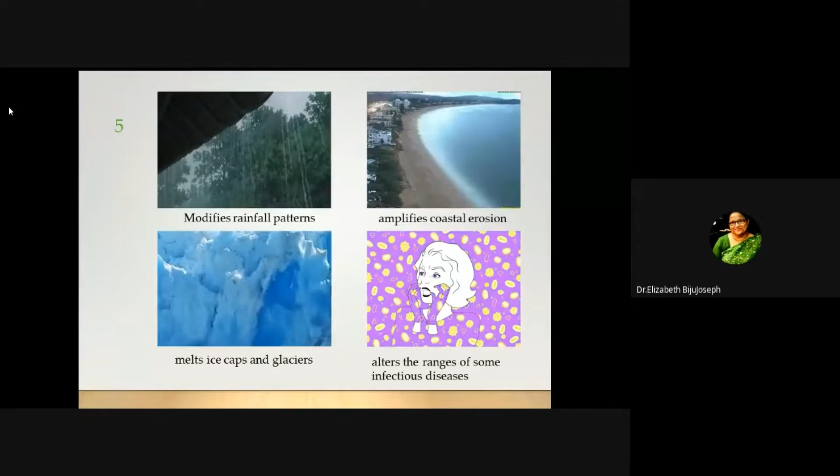Warming modifies rainfall patterns, amplifies coastal erosion, melts ice caps and glaciers, and alters the ranges of some infectious diseases. Some of these changes are already occurring.

Which are the primary greenhouse gases responsible for global warming? Water vapor, carbon dioxide, methane, nitrous oxide, and ozone. The larger the global warming potential, the more that a given gas warms the earth.

Anthropogenic emissions of water vapor are small in comparison to the large evaporative emission of water vapor from the ocean. Methane, nitrous oxide, and ozone have a much larger global warming potential than carbon dioxide.

Then why is carbon dioxide so important? It depends on how long it stays, the period that the gas is present in the atmosphere. Carbon dioxide stays for thousands of years, unlike the other gases. Therefore, its concentration at a given time increases in the atmosphere as man-made emissions happen. So we know that when we talk about the greenhouse gases and global warming, carbon dioxide mitigation is so crucial.

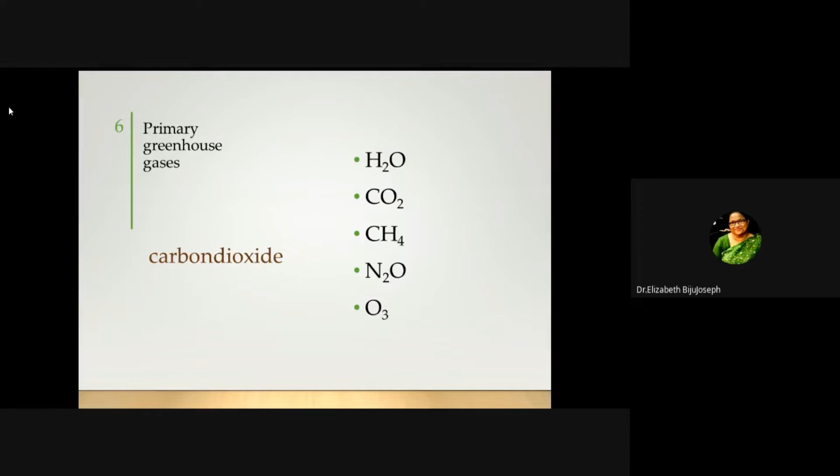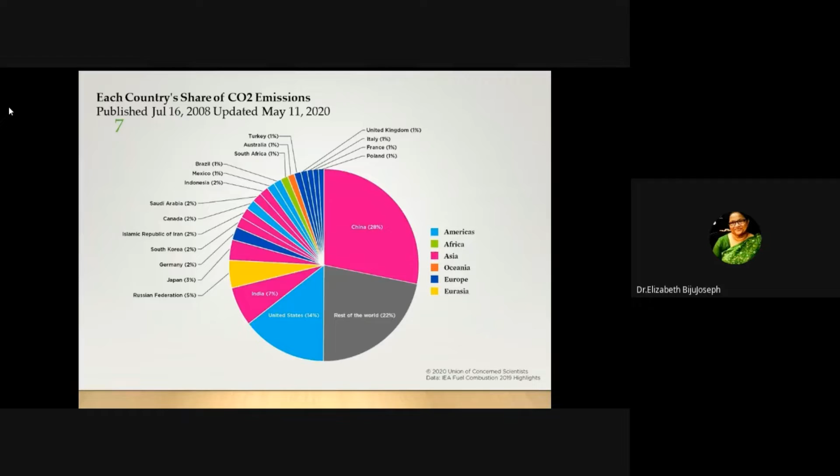Today, we are going to focus on carbon capture from industrial emissions as a way of mitigating the concentration of carbon dioxide in the atmosphere. What are the sources of industrial emission of carbon dioxide? Carbon dioxide is emitted from large stationary sources. The largest single source of carbon dioxide are the conventional coal-fired power plants. Cement manufacture emits around half a ton of carbon dioxide for every ton of clinker.

What about refineries? For a 300,000 barrels per day refinery, the carbon dioxide emissions are in the range of 0.8 to 4.2 million tons per year. The iron and steel industry is one among the largest energy consuming manufacturing industries. Energy, again, that has to be highlighted. For every ton of steel, around 1.8 tons of carbon dioxide is emitted. Therefore, much effort has been put into the development of technologies for the capture of carbon dioxide from process streams.

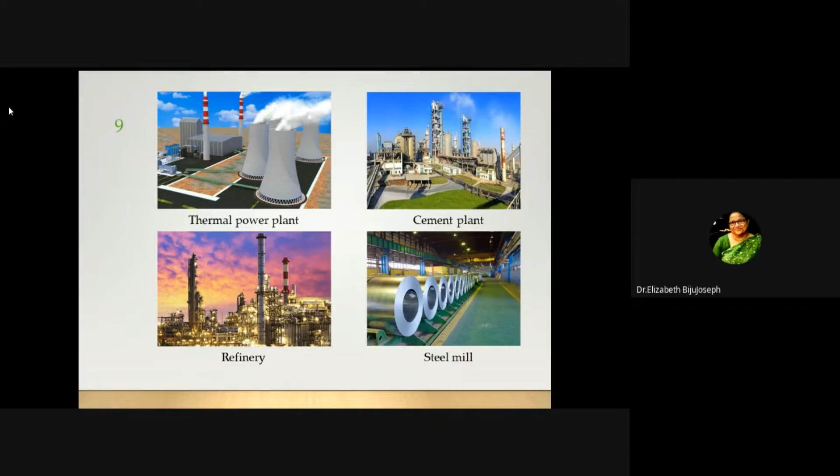This is a closed loop absorption-desorption system, where absorption occurs in a packed tower at a low temperature of around 40 degrees Celsius, and desorption of carbon dioxide from the loaded absorbent is accomplished at a higher temperature, around 100 degrees Celsius. This is a common process configuration. In the power plant, we need to prepare steam and to vaporize or evaporate water. The process requires energy, and the energy is supplied from the combustion of coal.

The flue gas, the product of combustion, carries a large amount of energy. After the energy transfer in the power plant, in the economizer, then the evaporator, the superheater, and finally the air heater, the flue gas which leaves the power plant carries around 14% carbon dioxide. There are other gases along with it. The carbon dioxide capture plant focuses on absorbing this carbon dioxide and making the gas within permissible limits of the environmental regulations so that it can be exhausted into the atmosphere.

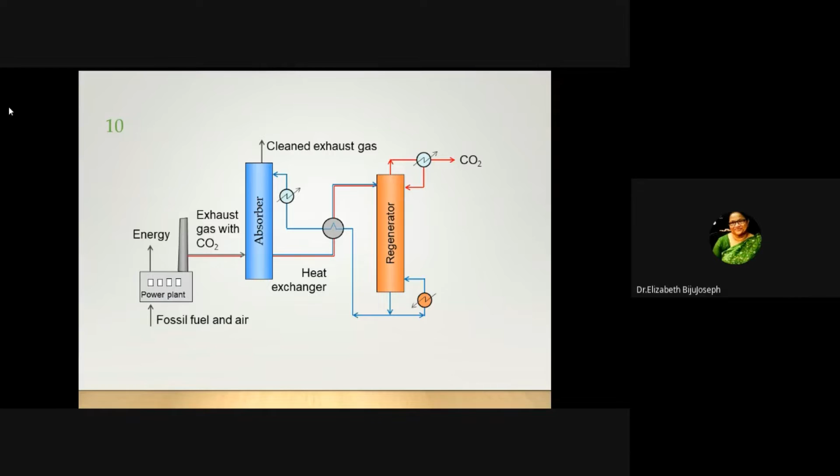And what are the solvents? Which are the solvents that I will be using? The solvents may be classified as physical solvents and chemical solvents. What is physical solvent? Physical solvent is that solvent which absorbs the carbon dioxide without having any chemical reaction, which means the operation is purely physical absorption. The driving force is the concentration difference of carbon dioxide or the pressure difference, which necessitates the need of having a high inlet gas pressure.

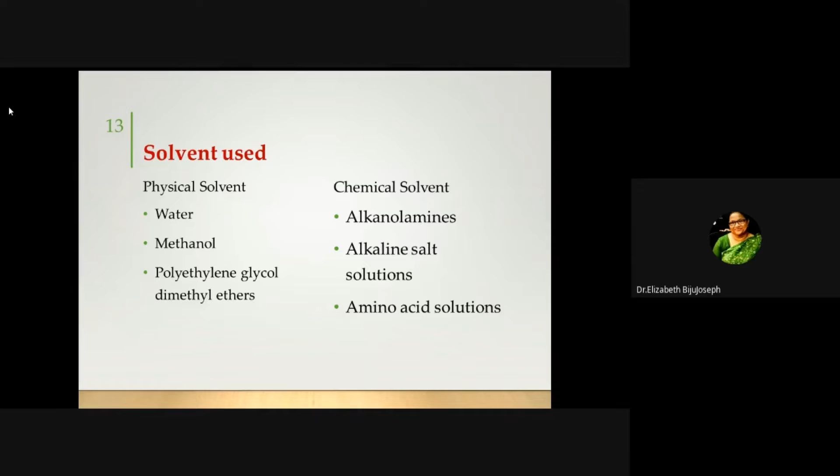So one can use any of this. One could use amino acid. Why would somebody use an amino acid? Because it is again green. The pollution due to the absorbent reduces. Having said all of these things, how do we design the equipment? How do we design the absorber, the regenerator? What are the different parameters that I need to evaluate?

We need to find out the optimum concentration of the amine in the solvent. The primary solvent is water, and you add the amine into it. The concentration of amine is very less. It can be around 2 molar or maybe 3 molar. And you could use very small amount of say 0.1 molar or 0.5 molar of these blended additives which will enhance the reaction. So we need to arrive at the optimum concentration of the amine in the solvent to obtain our degree of separation or absorption of carbon dioxide.

The next thing that one needs to calculate is how much is the regeneration energy to be supplied. As I said, that contributes to the major expense of this operation. What will be the concentration of carbon dioxide in the stream which leaves the absorber? We wouldn't want to work towards 0% carbon dioxide. It wouldn't be economical and not essential.

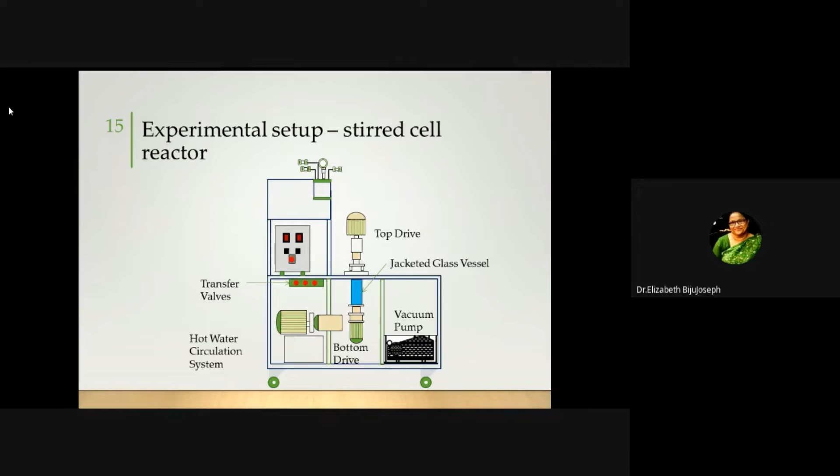These are ionic reactions, and therefore the measurement of conductivity using a conductivity meter ascertains the reaching of equilibrium. If the conductivity reading remains constant for a period of 6 hours, the equilibrium is assumed to have attained. Further to which, the system is switched off, by which I mean the stirrer, the heating, and the fan are switched off, and the samples from the liquid phase and the gas phase are analyzed to know the composition of carbon dioxide at that temperature condition, the composition of carbon dioxide in the liquid phase and the vapor phase.

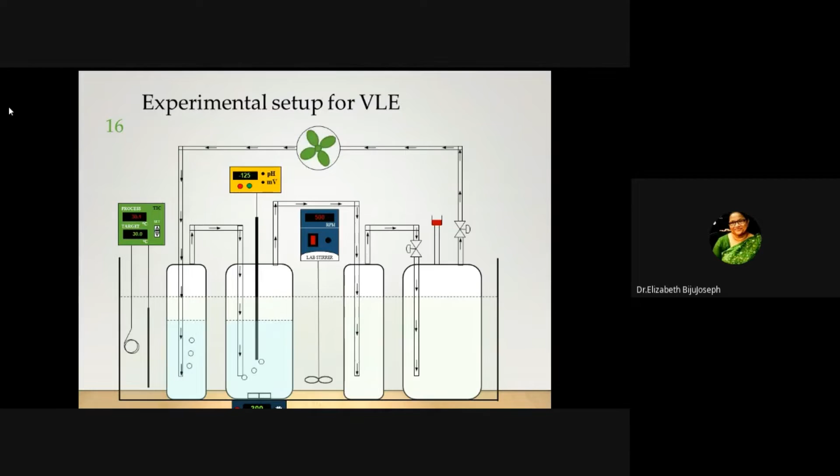This experiment may be repeated at different temperatures and different loading conditions to generate the vapor liquid equilibrium data. Once we have the vapor liquid equilibrium data and the kinetic data with us, we are now enabled to design the column for our conditions. Having said all of these things, this technology of reactive absorption of carbon dioxide for carbon dioxide capture is already implemented in India and abroad.

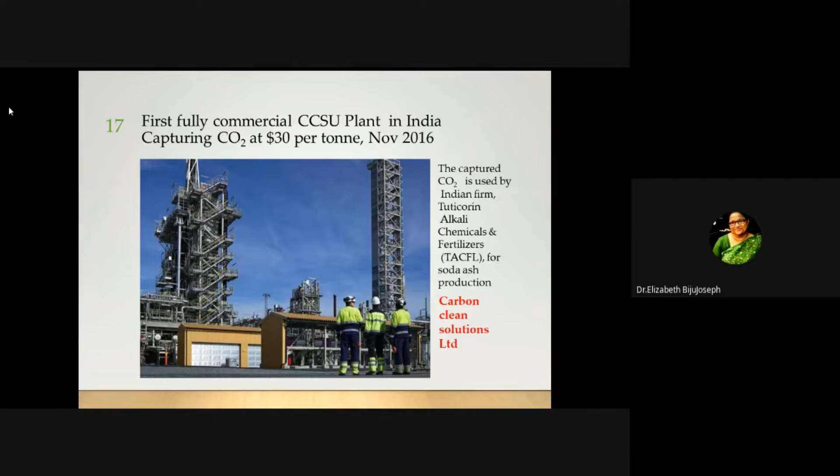The first carbon capture, storage, utilization plant in India was commissioned in November 2016, capturing carbon dioxide at around $30 per ton, when at the same time the other parts of the world captured carbon dioxide at almost double the cost. The beauty of this plant is that the captured carbon dioxide is entirely used by the Tuticorin Alkali Chemicals and Fertilizers adjacent to it for their soda ash production. The technology is provided by Carbon Clean Solutions Limited. This is a zero emission plant. Let us look at another one.

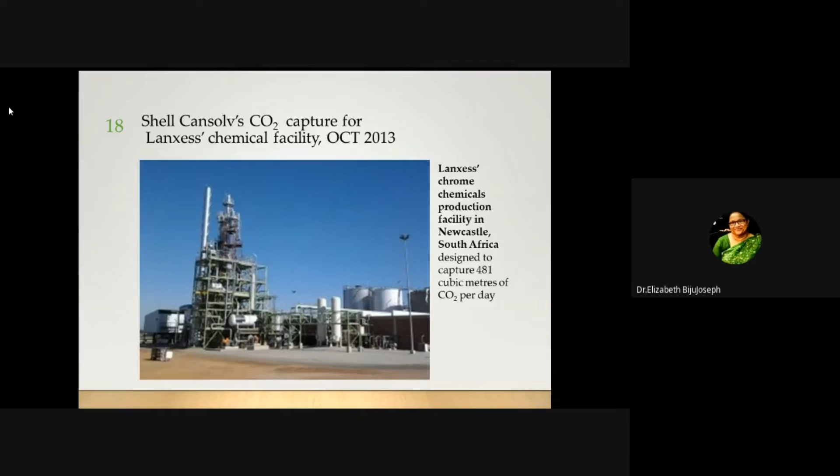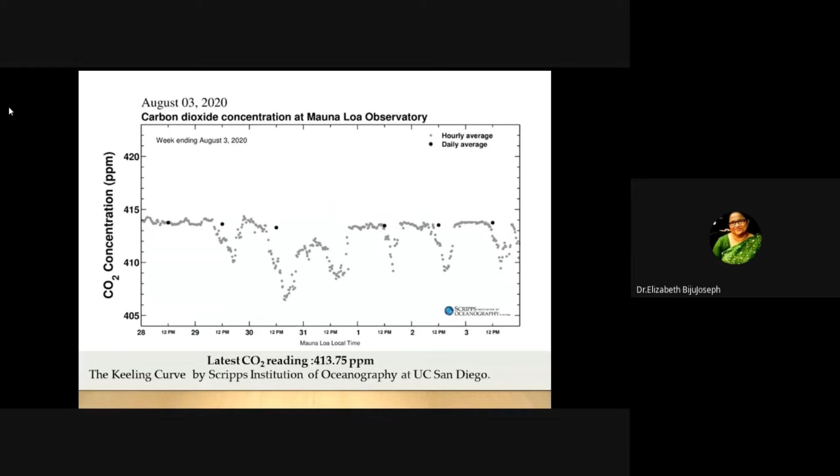In the light of this, we as chemical engineers, each one of us, whether we are already a chemical engineer, whether we are pursuing chemical engineering, or we are students of sustainability, we have to join hands together with all other disciplines to address carbon dioxide mitigation, to pass on to the next generation a world that is livable.

Finally, in closing, this is a quick overview of my presentation and publication, which go into greater detail on this topic.

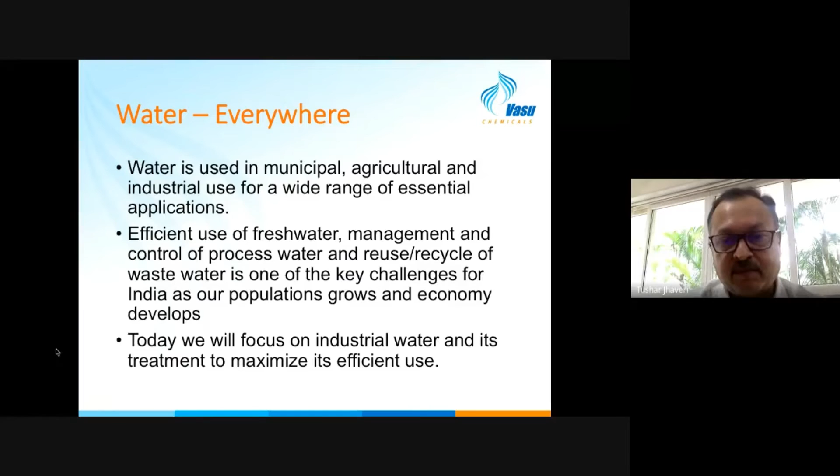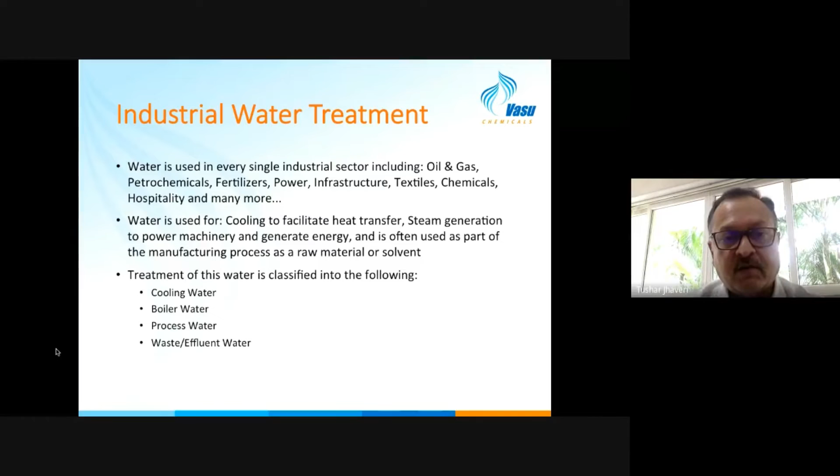Water is used in every single industrial sector, including oil and gas, petrochemicals, fertilizer, power, infrastructure, textile, chemicals, hospitality, and more. It has several uses in the industry, for example, for cooling, for steam generation, often used as part of the manufacturing process as well as a raw material or as a solvent in the actual process of the industrial unit. Hence, the treatment of water can be classified into the following for industries: cooling water, boiler water, process water, and waste or effluent water treatment.

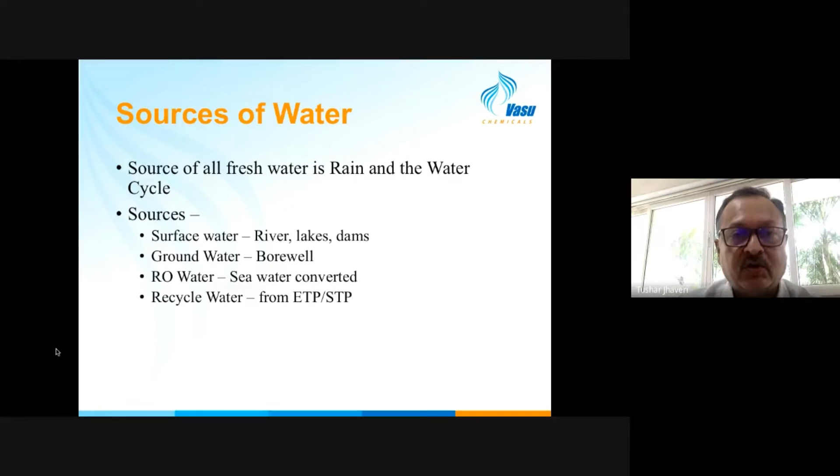The water cycle is most critical. We are well aware of this. I guess we have learned this right from our school days, where the evaporation from the oceans and the land goes into the clouds, and the condensation of the clouds and the precipitation leads to rain, and the water again runs off with the rivers into the water table and into the sea. So this is a cycle that sustains mankind and is the source of our lives and very important for us to survive.

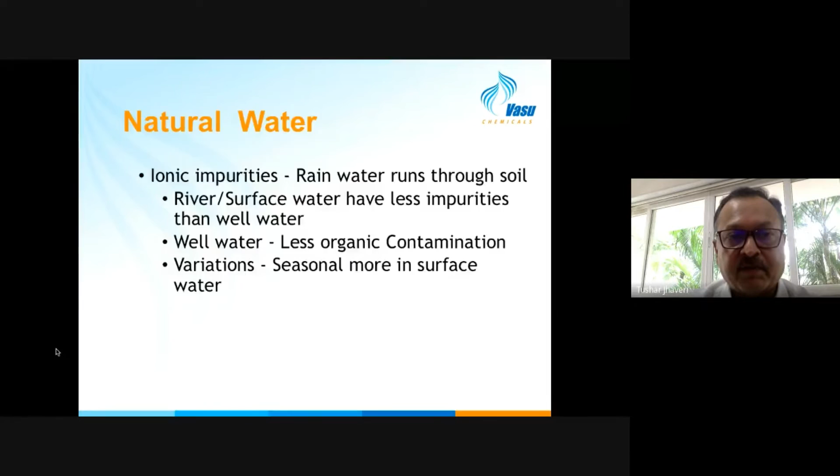Natural water, when it runs through the soil, will have a lot of ionic impurities. The river and surface water will have less, well water will have maybe less organic contamination, and all these impurities vary with season, more so for surface water. If we look at the hydrological cycle, more than 97.6% of the water is in the oceans. The rest is divided into the ice caps and the glaciers and the groundwater and the lakes and rivers and even the atmospheric moisture. But primarily our water is all stored in the oceans.

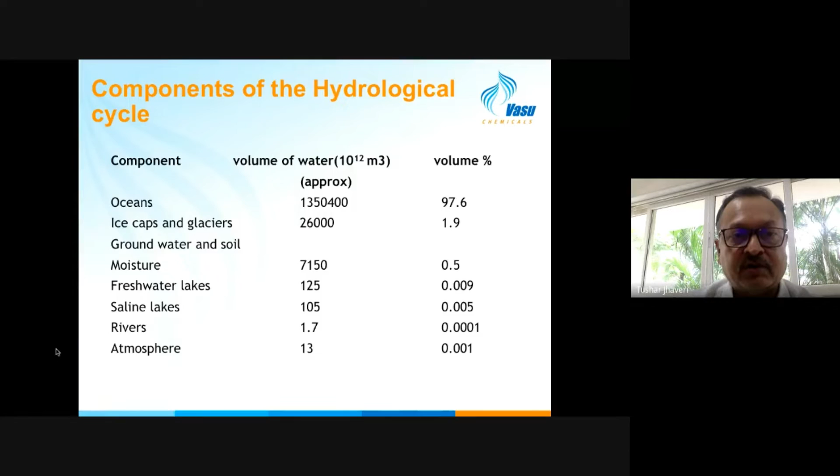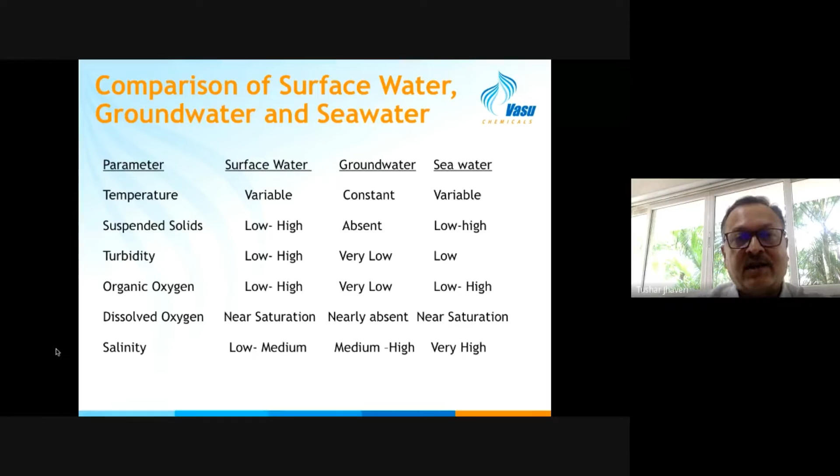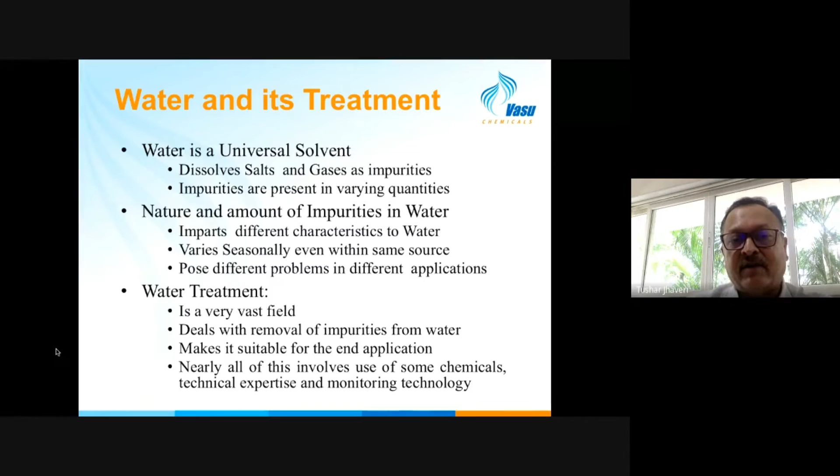Hence, water treatment. This is a very vast field and deals with removal of impurities from water to make it suitable for the end application. Nearly all of these treatments involve use of some chemicals, technical expertise, and monitoring technology. This is very key, and that is where chemical engineering plays a very key role in water treatment.

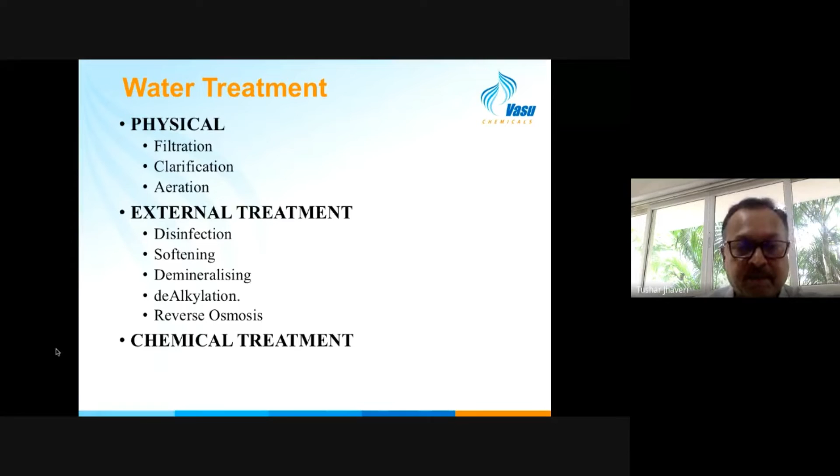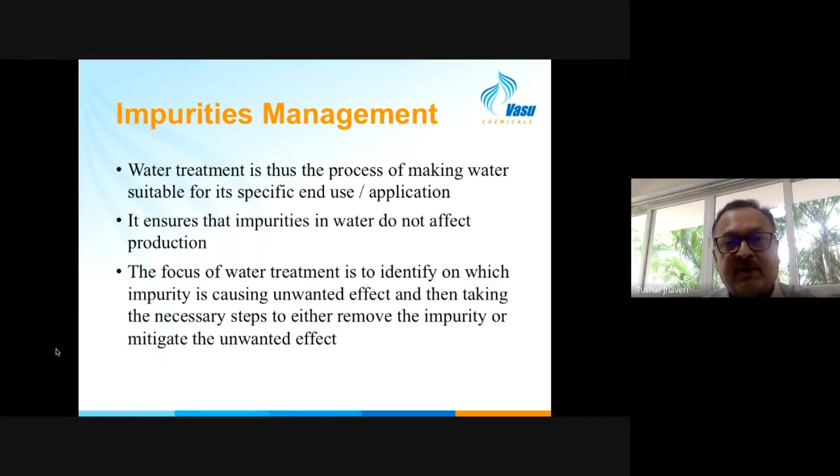So the focus of water treatment always is to identify which of the impurities would cause these kinds of unwanted effects, and then take necessary steps to either remove the impurity, which would be physical, or mitigate the unwanted effect, which is typically the chemical treatment. So this is how impurities management can be broadly understood.

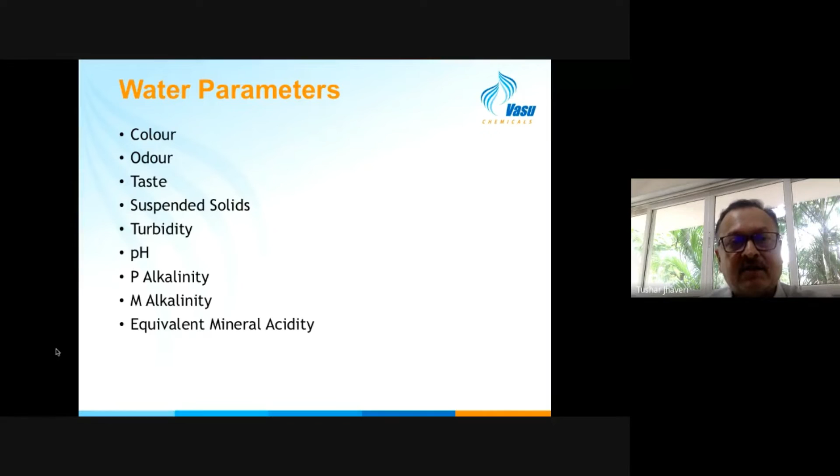So what are the primary water parameters that we would look at when we consider water treatment? Very basic again: color, odor, taste, suspended solids, turbidity, pH, alkalinity, equivalent mineral acidity, chlorides, sulfates, hardness, calcium, magnesium, sodium, iron, silica, TDS, conductivity, oxygen absorbed, COD, BOD, total organic carbon. I will touch on a few of these critical parameters that play a significant role in industrial water treatment.

Color. This is very important because it indicates the presence of undesirable dissolved, colloidal, and suspended impurities in the water. For example, if there is iron present in the water, you will see a slightly brownish or reddish tinge. Manganese would make it black, and if you have organics, then there would be a slight yellowish tinge.

Color is again very important because it gives an aesthetic value to the water and also potability. If you had water with slight coloration, you would never drink it, right? So color of the water is very important for it to be clear and transparent for use.

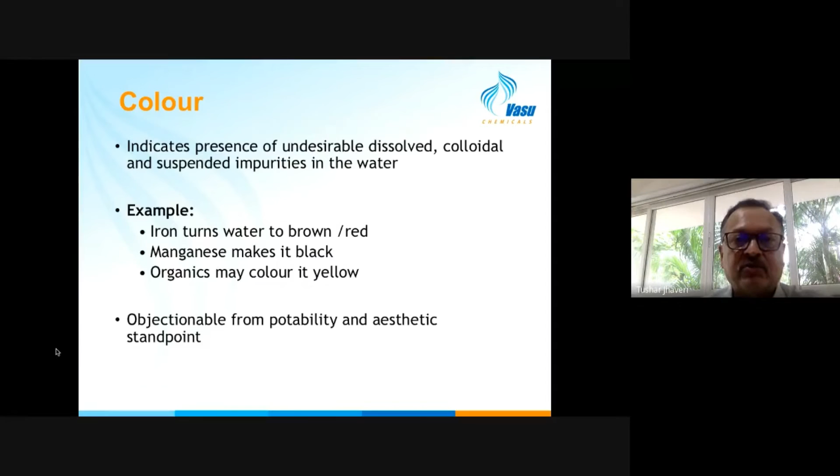Odor and taste is also very important because it indicates undesirable impurities, maybe such as hydrogen sulfide or sewage contamination. This is an important water parameter, especially in the food and beverage industry, because you don't want the water being used to impart any odor or color to the final food being produced in the unit.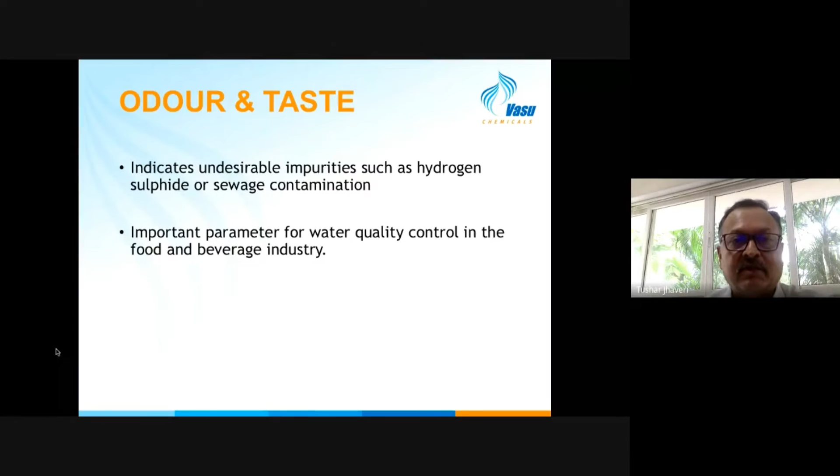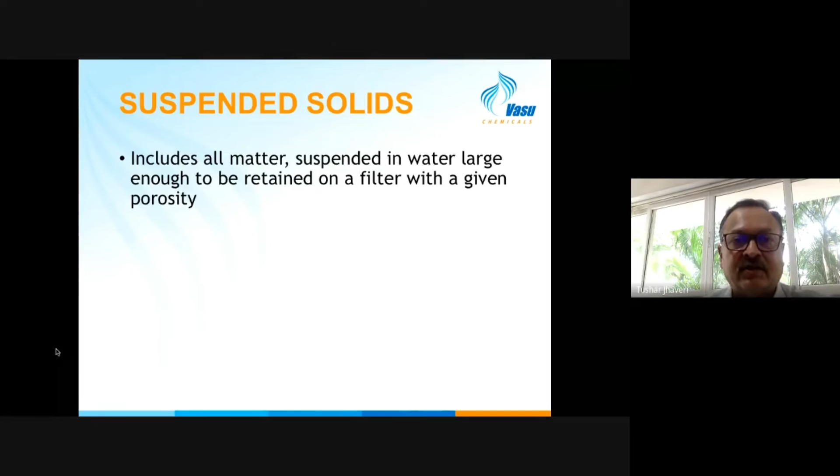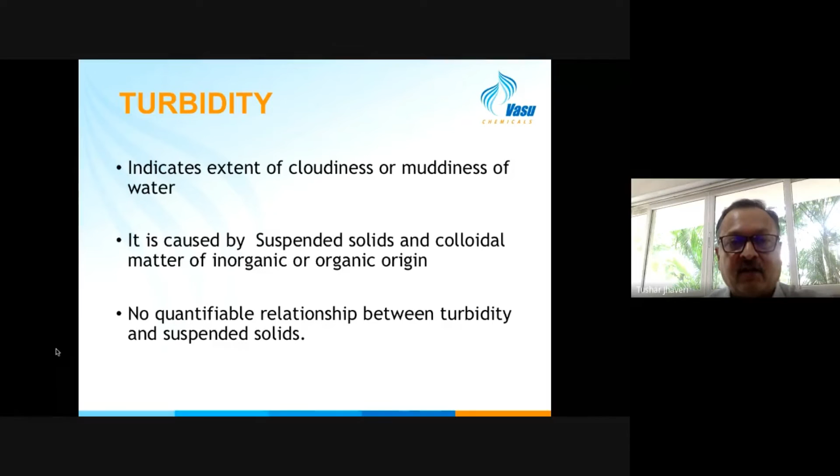All matter suspended in water large enough to be retained on a filter paper are called suspended solids. These are the undissolved solids in the water. Turbidity indicates the extent of cloudiness or muddiness of the water, again caused by suspended and colloidal matter. It can be of inorganic or organic origin, but something that hinders the passage of light, causing turbidity. This is also a very important parameter used in water treatment.

Total dissolved solids are the total content of dissolved matter in water, representing all the charged ions and also the uncharged ions and molecular species of the same. As a summation, you can say the cations are mainly calcium, magnesium, sodium, and the anions would be bicarbs, chlorides, sulfates, and silica.

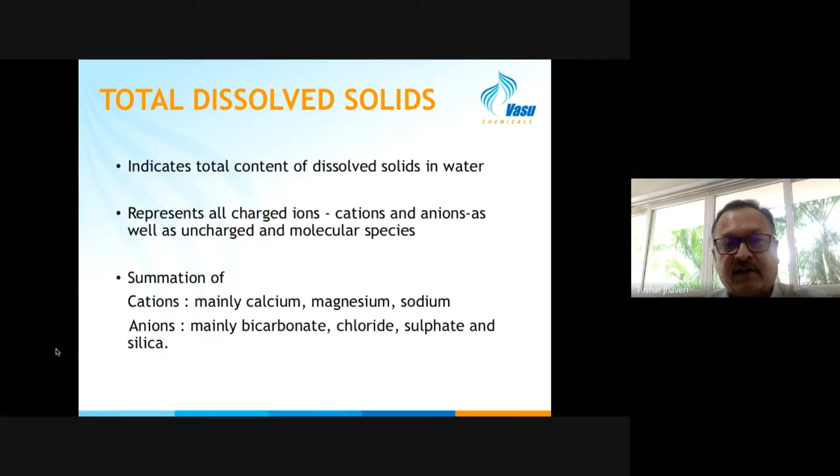Conductivity is also a very quick and important measure. It is a true indication of the purity of water. Higher the conductivity, higher the content of the ions, and higher the impurities of the water, and vice versa. An empirical formula exists between electrical conductivity and total dissolved solids, and this conductivity is also very temperature sensitive and affects the corrosivity of the water.

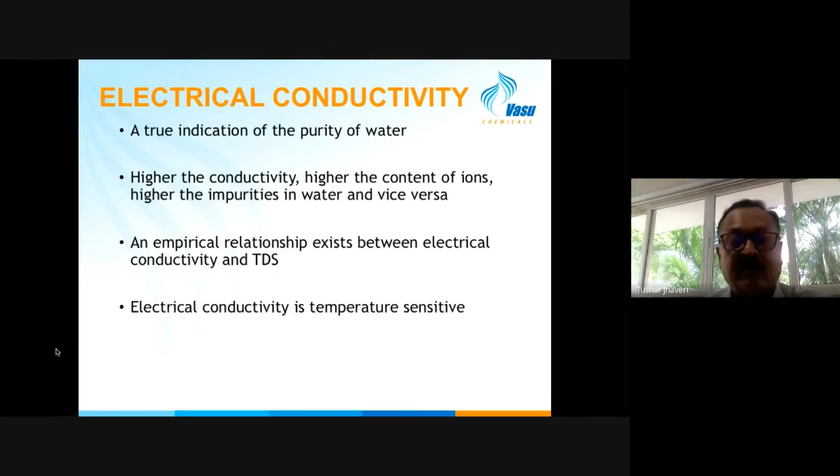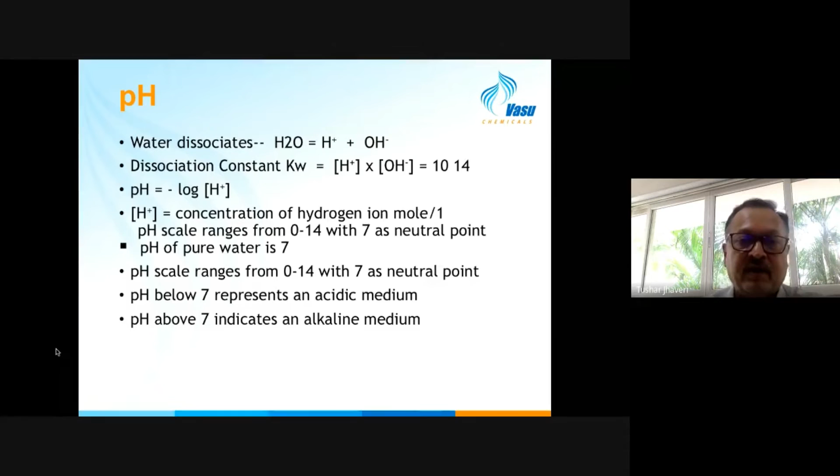pH is another basic parameter. We have all learned this and analyzed it in the lab. It's a well-known parameter of water. Water dissociates into H and OH minus, and the negative logarithmic of this is the pH scale, an empirical scale from 0 to 14, where 7 is a neutral point, below 7 is the acidic area, and above 7 is the alkaline medium.

Alkalinity indicates the quantities of bicarbs, carbs, and hydroxide in the water, or the alkaline salt content of the water, as it is sometimes referred to. It is the amount of acid necessary to neutralize the carbs and bicarbs, using two indicators: phenolphthalein and methyl orange. Hence we have the methyl orange alkalinity, or M alkalinity, and we also have the P alkalinity, which is the phenolphthalein alkalinity.

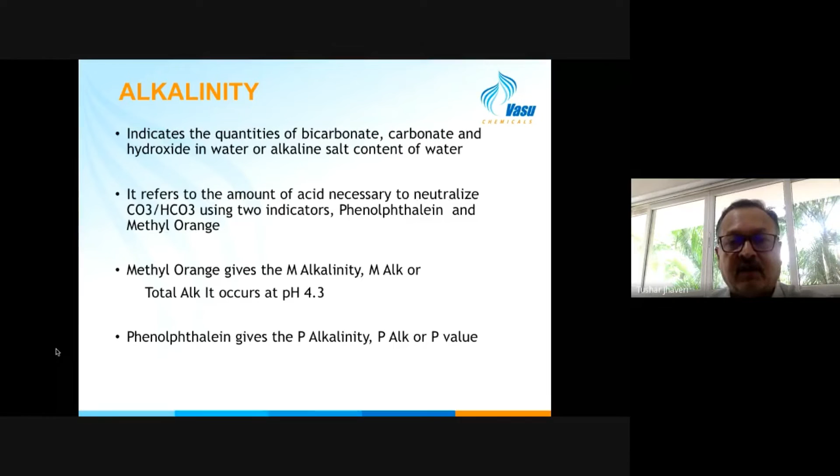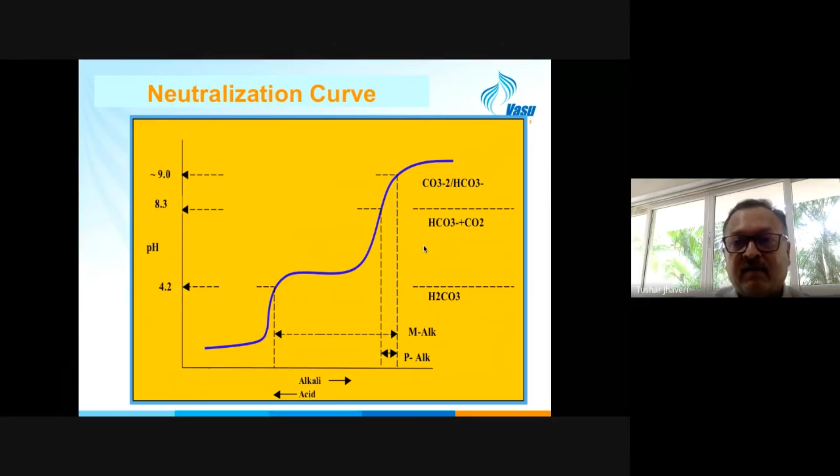This is a neutralization curve, which shows us where the alkali stands, where the P alkalinity stands. P alkalinity starts at about 8.3, 8.2, and the M alkalinity is at 4.2. So below 4.2 is free mineral acidity, and above 8.3 is the regime where you have more of the hydroxides. This is a very important curve used in the industry to understand what kind of ions are contributing to the alkalinity in the water.

Total hardness again is very important. It helps us assess whether the water is alkaline, whether the water is soft or hard. Part of the total hardness is associated with alkalinity in water and is referred to as alkaline hardness, carbonate hardness, or temporary hardness. The balance is associated with the mineral acidity of the water and is called the non-alkaline hardness or permanent hardness. This is again very important for selection of water sources.

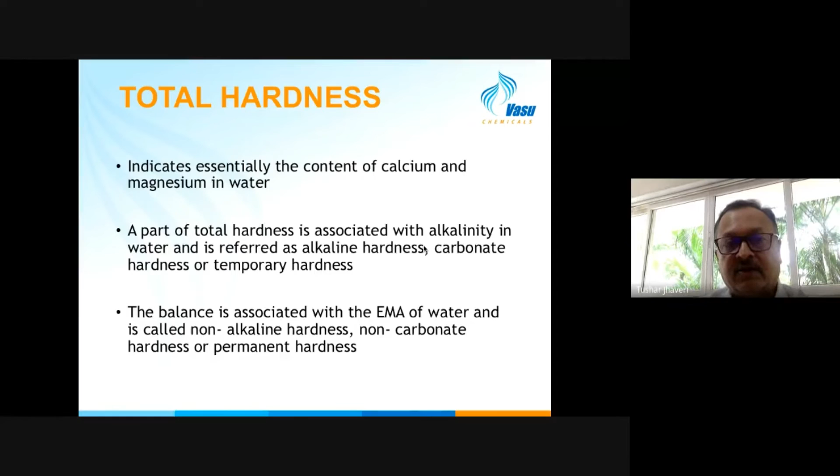Organic matter plays a very important role and impacts water usage everywhere. It covers all substances in water susceptible to oxidation, expressed by various indices, some commonly used in industry like COD and BOD. The COD indicates the organic matter oxidised by hot acidified potassium dichromate, covering the majority of organic compounds and oxidizable mineral salts, whereas BOD represents the amount of oxygen used by microorganisms to consume biodegradable organic matter in wastewater under aerobic conditions. Generally, for BOD analysis, the sample is incubated for 5 days and the result is reported as BOD5, with the 5 as a subscript.

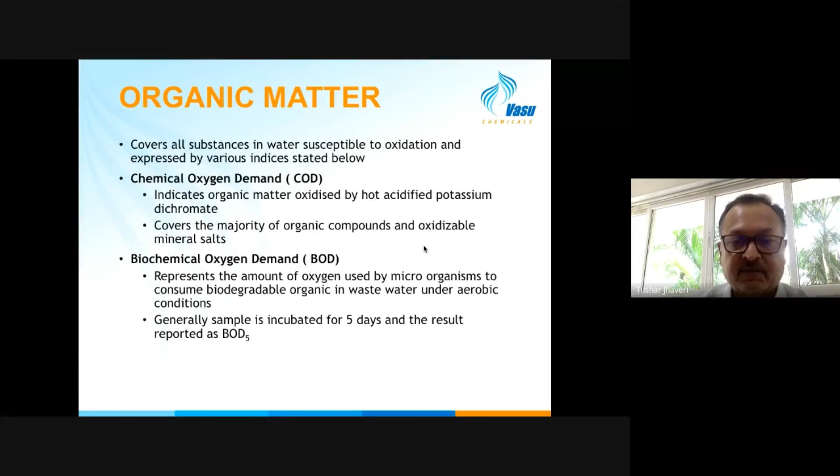We now come to the various types of industrial water treatment: the cooling water, the boiler water, the process water, and the wastewater.

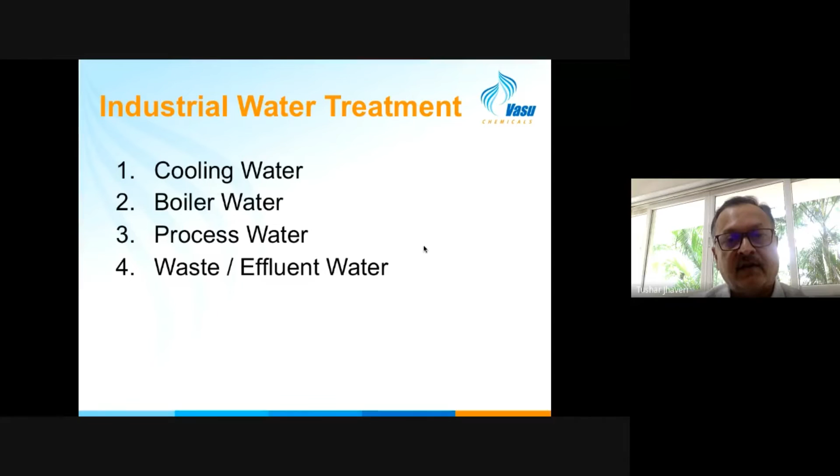While recirculating, there are a lot of problems associated with this water, and these can lead to problems in heat transfer of the equipment in the plant, including corrosion, scaling, and microbiological fouling. These are both interdependent and inter-influencing, and it is important for any industry to ensure proper control of these problems to ensure optimum usage of the cooling water circuit.

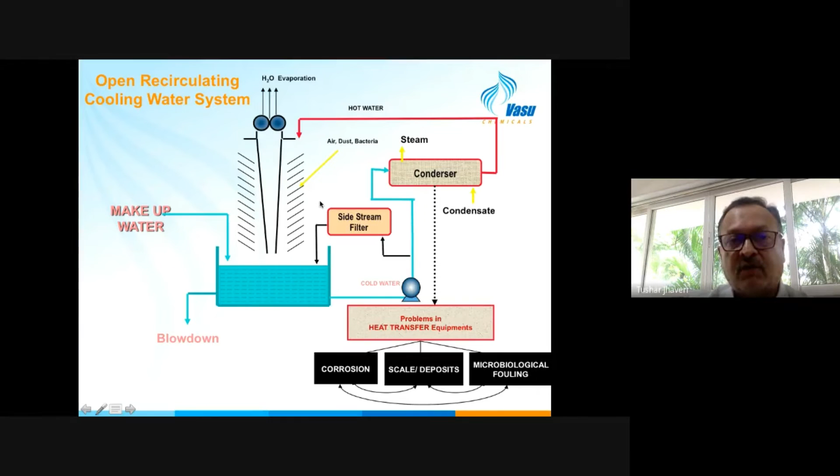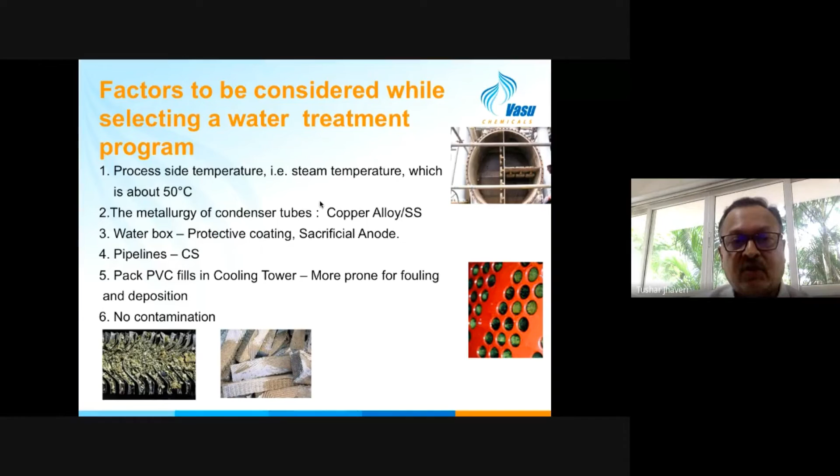These are the factors that are important to consider while selecting a water treatment program: the process side temperature, the metallurgy of the heat exchangers, the water box, the pipelines, and the fills in the cooling tower. The fills are the packing in the cooling tower where heat transfer takes place between the hot water and the air. And of course, there should not be any contamination coming into the cooling water system.

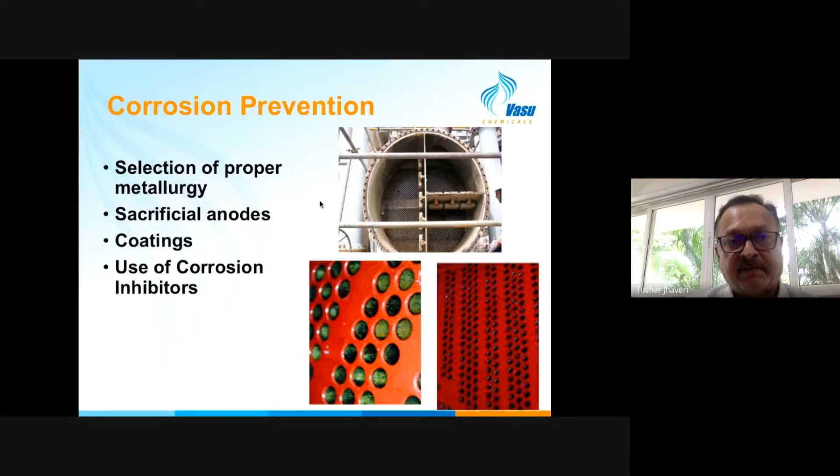So we first talk of corrosion prevention in cooling water systems. The most important measures are selection of proper metallurgy, sacrificial anodes, coatings, and use of corrosion inhibitors. All four are important, and depending on the type of metallurgy of the plant and the economics involved, the proper program can be selected. The corrosion process is well known: it occurs due to the presence of local cells with anodic and cathodic sites on the metal, mediated by electron transfer through an electrolyte. This is something we have learned right from our school days, and this process is very well established, well researched, and well understood, with a lot of different types of treatments available to mitigate it.

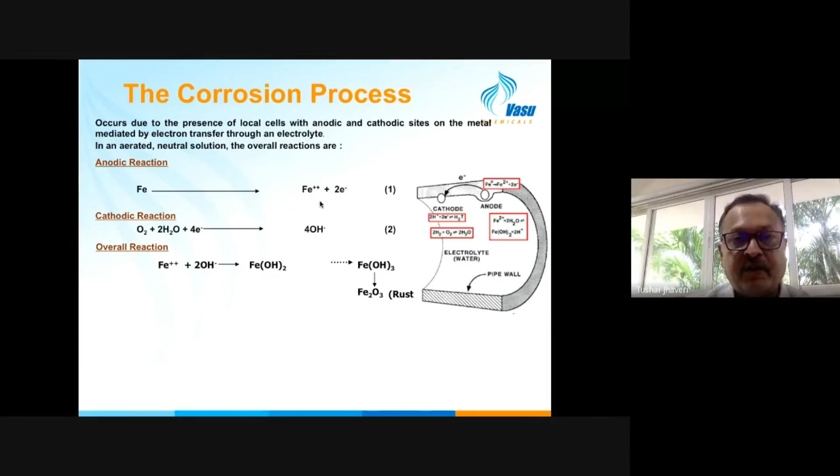This includes anodic inhibitors, which are chromates, nitrites, orthophosphates, and molybdates, or cathodic inhibitors like phosphates, zincs, and controlled deposition of calcium carbonate.

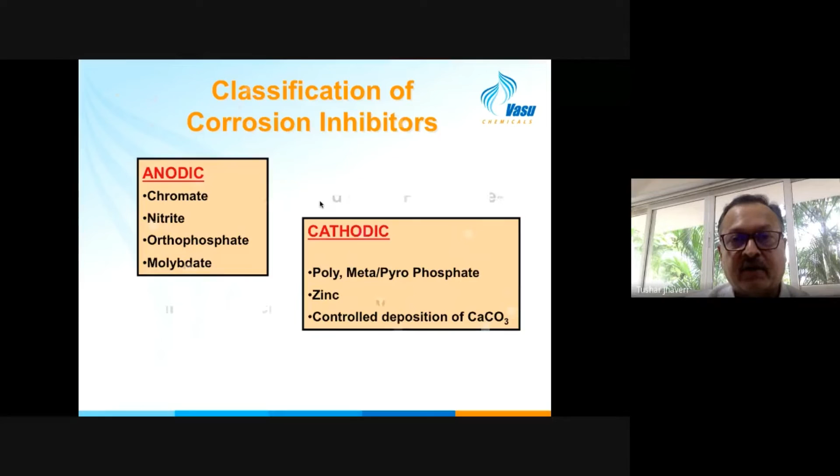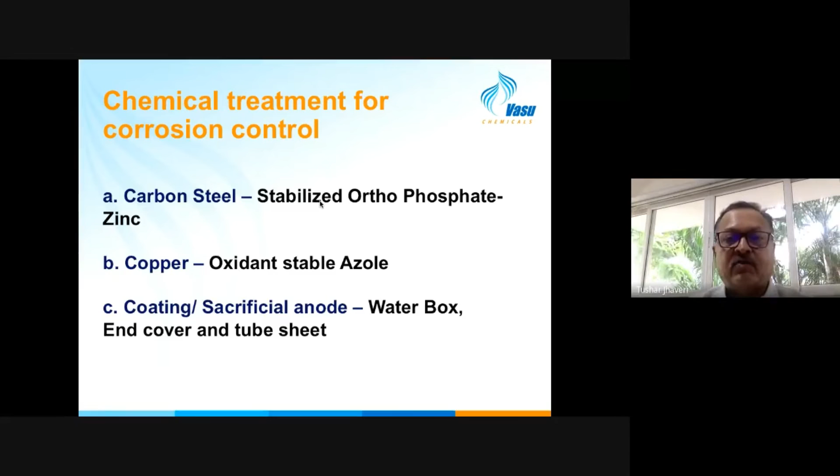Chemical treatment for corrosion control depends on the metallurgy. For example, for carbon steel, the typical programs used are stabilized orthophosphate zinc. For copper and copper alloys, oxidant stable azoles are used, and for sure coatings and sacrificial anodes are used in water boxes, end covers, and tube sheets.

The next problem in cooling water systems is scale formation. These are dense, adherent, and hard material composed mostly of calcium and phosphate salts, but usually heterogeneous in nature, and they can precipitate on the heat transfer surfaces and become very hard.

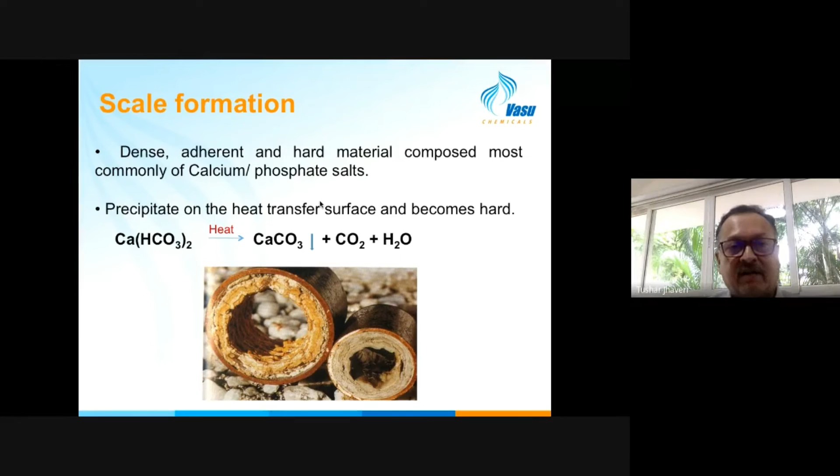Some types of common scales that are encountered are calcium carbonate, tricalcium phosphate, iron phosphate, magnesium silicate. Scales are very, very hard deposits, very difficult to clean. Magnesium carbonate is more uncommon, more rare to find.

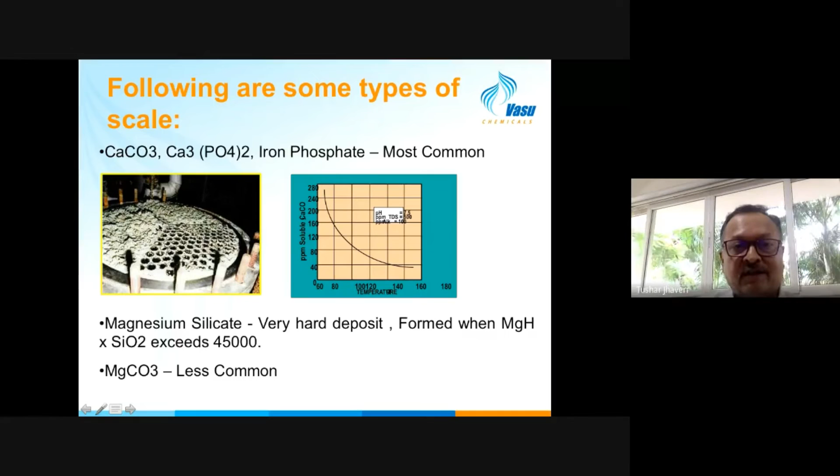So here you see a heat exchanger that is fouled with calcium salts, and you can see how it has plugged most of the tube entrances.

Water indices are also used to evaluate a scaling or corrosive tendency of water, and it's a predictive tool, very interesting to water treatment engineers, because it helps them select the correct treatment and the correct application of the chemicals.

Scale control is very important. It can lead to reduction in water flow, like I showed you in that other photo and this one. Poor heat transfer, reduction in plant load, will require frequent chemical cleaning, unscheduled shutdown maybe if the tubes get choked and the cooling is not happening.

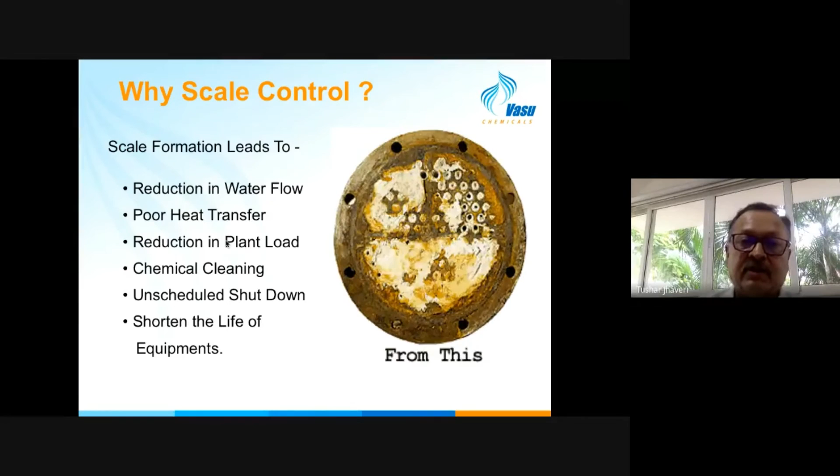And for sure, it will shorten the equipment life, because under the scaling you will have more corrosion, heat transfer restrictions, water flow restrictions. So scale control is very, very critical.

There are several ways to do scale control. You have physical methods, like softening, and chemical methods, which include crystal modification, which prevents regular crystal growth and makes them small and softer and irregular, preventing agglomeration.

Dispersion is the more common type used in the industry. It basically changes the charge of the particulate matter so that they repel each other and do not have an opportunity to agglomerate. So this is the normal method used in industry for scale inhibition.

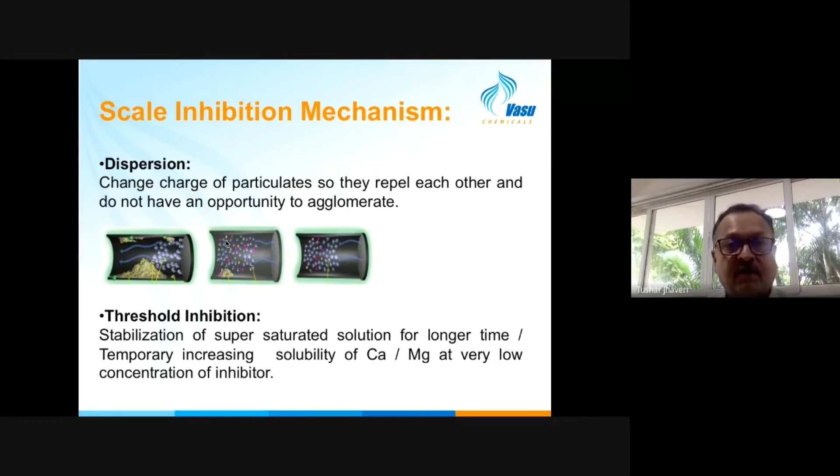The third important problem in cooling water treatment is microbiological fouling. The major classes of microorganisms associated with recirculating water systems are bacteria, which is in the water, and algae, which grows on the cooling tower structure and the distribution deck, primarily because it is exposed to sunlight and photosynthesis occurs on the structure.

This kind of algal growth is a very common sight in cooling towers. Fungal growth can also happen if you have wooden structures in the cooling towers, which can lead to delignification of the wood.

Mostly now the cooling towers are made of PVC fills, so this is becoming more and more rare. But still, in the older cooling towers, which are still in use in the industry, where wooden structures, louvers, etc. are used, fungal growth needs to be monitored.

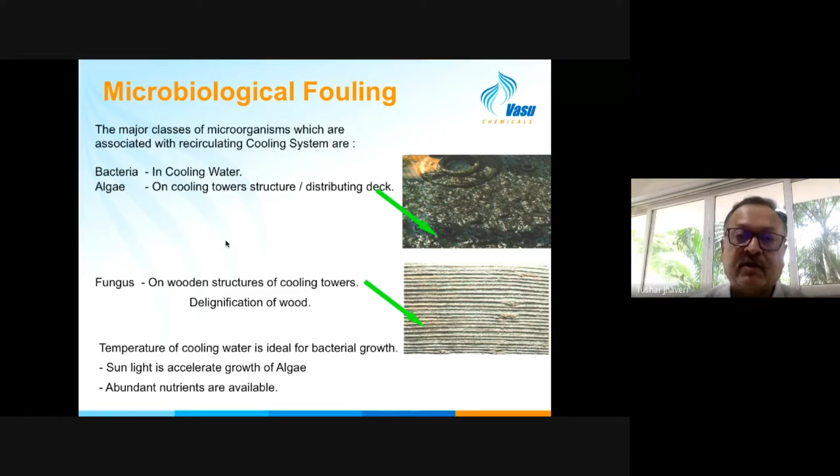Microbiological fouling and growth is very important in cooling water systems, particularly because a cooling tower is very conducive for microbiological growth because of the temperature in which it operates, the sunlight that is available, and the abundant nutrients also there in the circulating water. All these make microbiological proliferation in cooling water a very common phenomenon.

So what are the different types of bacteria that we find in cooling water systems? This is actually different from potable water bacteria that are typically found, because these are generated in the cooling water system.

Again, there are two types: one is the anaerobic type, which thrive in the absence of oxygen, and one is the aerobic type, which need oxygen to survive. The anaerobic type are like the sulfate reducing bacteria, and these typically are found under a deposit.

The aerobic bacteria include the nitrifying bacteria, the iron bacteria, and most important are the slime forming bacteria, because they form a very sticky gelatinous mass which traps the suspended solids and even other bacteria, protecting them from the treatment chemicals. Further, the slime forming bacteria also have an insulating effect. So, if you see the biofouling, that is where this topic will be discussed more.

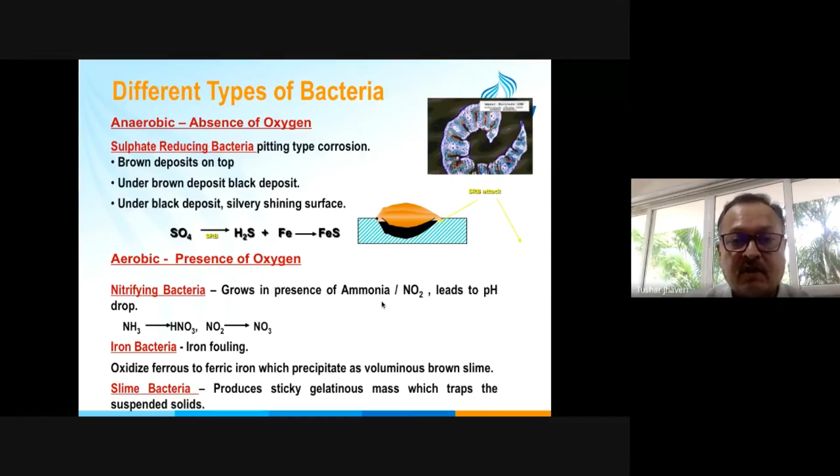Now, the challenge here again is monitoring, because when we take a sample of water and analyze it, what we are analyzing is the planktonic type, whereas the problems are caused more by the sessile bacteria. And this is one of the largest problems in monitoring of cooling water systems, and something that we need to be very careful about.

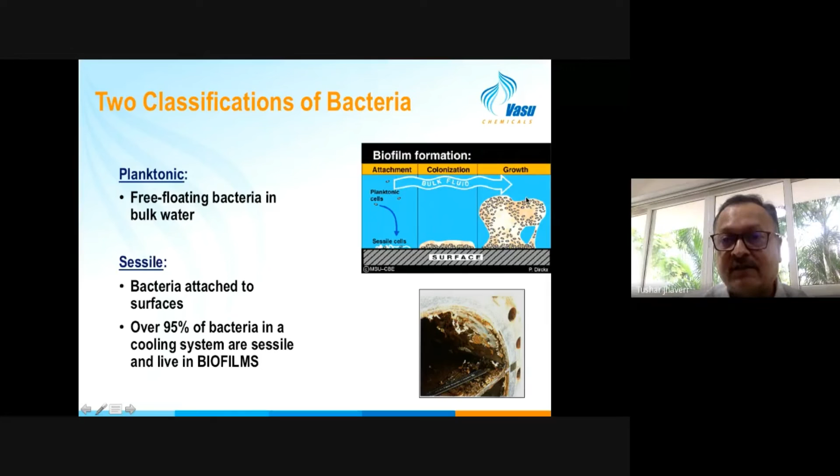This drawing indicates how the planktonic cells get attached to the metal and then the biofilm keeps growing, and this biofilm is protecting all the different bacteria and the suspended matter as well. As the colonization progresses, this is a very typical phenomenon that is observed.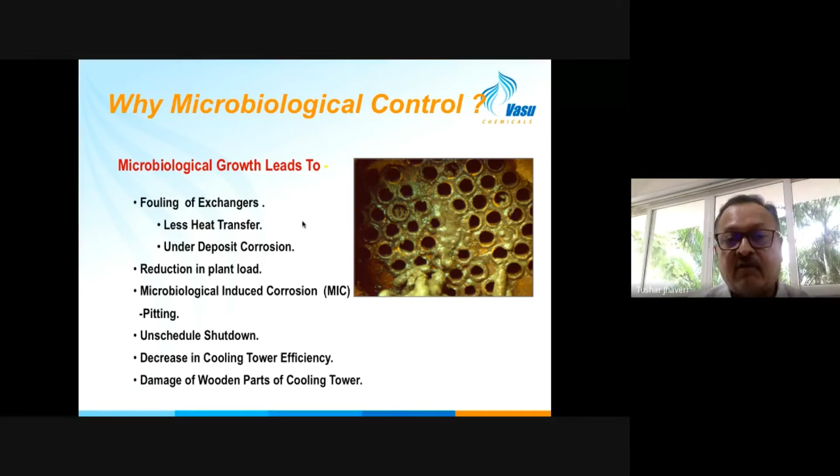So why microbiological control? Fouling: you can see the slime formation on the tubes and the heat exchangers. This is common if microbiological growth is rampant. This is highly insulative, sometimes as much as 4 times less thermal conductivity than even calcium scale. So it's very, very critical. It also leads to under deposit corrosion, which can reduce plant operating loads. It can lead to pitting corrosion and unscheduled shutdown. It will reduce the cooling tower efficiency, and it will damage the wooden parts, if any, in the cooling tower.

So how do we control microbiology? We have two types of product ranges for that. One is the oxidizing biocides like chlorine gas, which even our municipality uses for disinfection of our domestic water. There is also sodium hypochlorite, which some people are spraying during this time of COVID. There is bromine, there is ozone, there is chlorine dioxide.

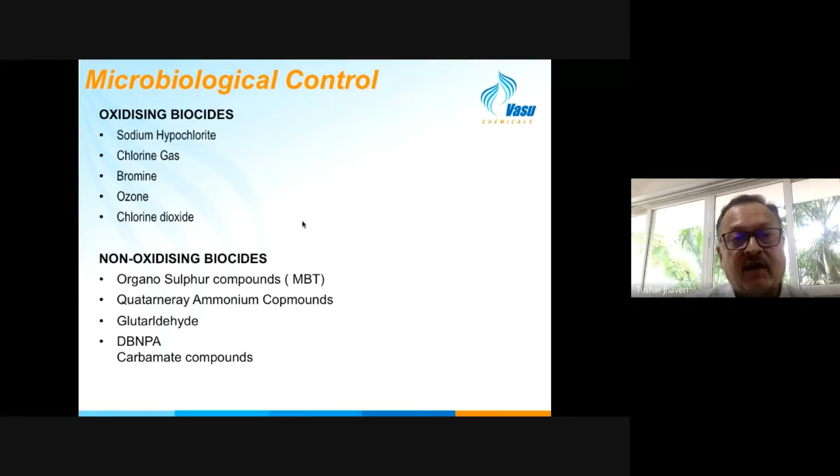There are also non-oxidizing biocides, which are shock dosed on an intermittent basis. These include organosulfur compounds, quaternary ammonium compounds, aldehydes, DBNPA, and carbamate compounds. So a lot of different chemistries are available, and again, it's a deep science to understand which is the correct biocide for a particular application, and that requires a lot of understanding and monitoring of the water system. The biodispersion is also very important.

If you see, this is the metal surface on which you have the slime or the biofouling with the bacteria and the suspended matter being protected. And these pins are the biodispersant, which is pinning and attacking this biofilm to penetrate and reach the bacteria. Over time, if the product is working well, it will break up the biofilm into smaller parts which come into the water phase, where they can be killed with the chemicals in the water. So the removal of the biofilm and release of the trapped bacteria into the bulk water is very important. Unless the biofilm is loosened and removed, the bacteria will continue to thrive.

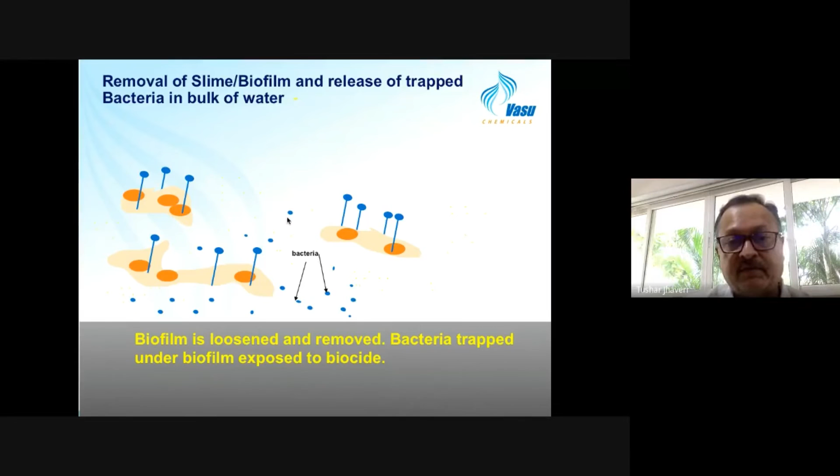So that was a very brief discussion on cooling water treatment. The next is boiler water treatment. A large part of the water used by industries is used in boilers to generate steam, which we all know is required in industrial processes. There are many types of boilers, but I have broadly divided them into 3 types. There are many more, like I said.

You have the fire tube package boilers, which are the low pressure boilers. LP is low pressure boiler. Then you have the water tube boilers, which are the waste heat recovery boilers, and these are the medium pressure boilers. These are typically found in most large industries because they help to recover the waste heat as well. And then you have the water tube boilers for power and process applications, which are the high pressure boilers, and these are very typically used in power plants.

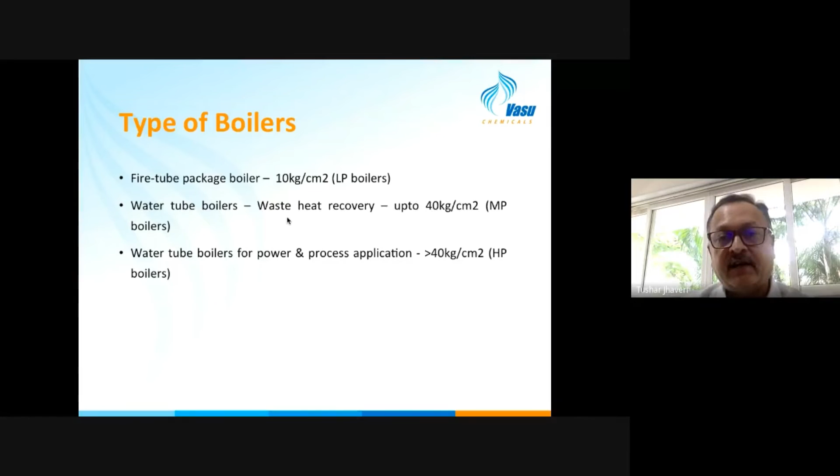This is a typical schematic of a boiler water system. You start with maybe demin water or a softened water that goes to the deaeration, and then from the boiler feed water pump, it goes into the boiler drum. This is the whole boiler unit. And then you have intermittent blowdown from the bottom, or you have continuous blowdown from the system.

And the steam will go into the power plant, into the industrial plant. If it is a power plant, it will go to the steam turbine, or it will go to the condensers, and then it will go back to the condensate tank where it is collected. If it's a paper mill, it will go into the paper mill, and the steam will be used in the process, and then again the condensate will go here.

So depending on the type of the plant, whether it's a power plant or a refinery or a paper plant, the steam is used in the process. That is what this indicates. And then this condensate tank, where the water is condensed, it is pumped as a condensate water. It's called the return condensate, and that again makes up as a makeup water, as a feed water to the boiler, because this is a very pure water. So this is a typical boiler system schematic.

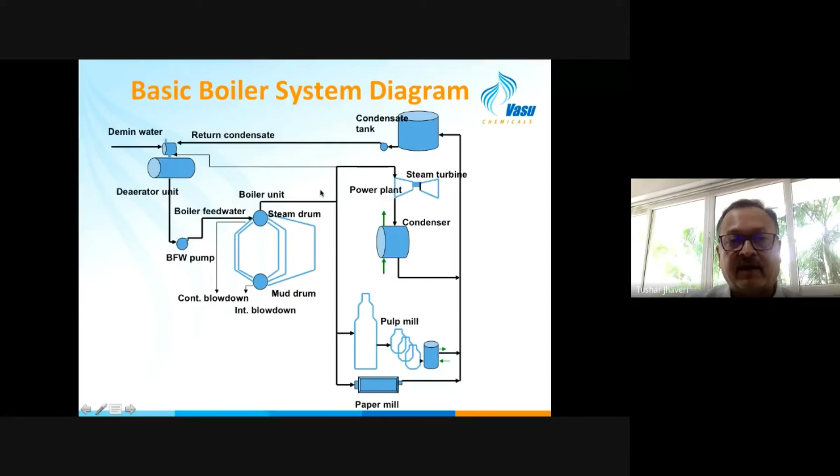So what are the general problems that we have with such steam generating boilers? In the low pressure boiler, the problems are obviously diminished. We all have corrosion because of the dissolved oxygen and the condensate lines and the damage that the boiler and ancillary equipment will face. There will be scale again leading to tube overheat and failure. There will be sludging if the drum is dirty.

There will be foaming. So there will be a carryover of impurities along with the steam. So it's not just steam, it becomes wet steam and creates more problems, which is called the carryover, and the priming, which affects the steam purity.

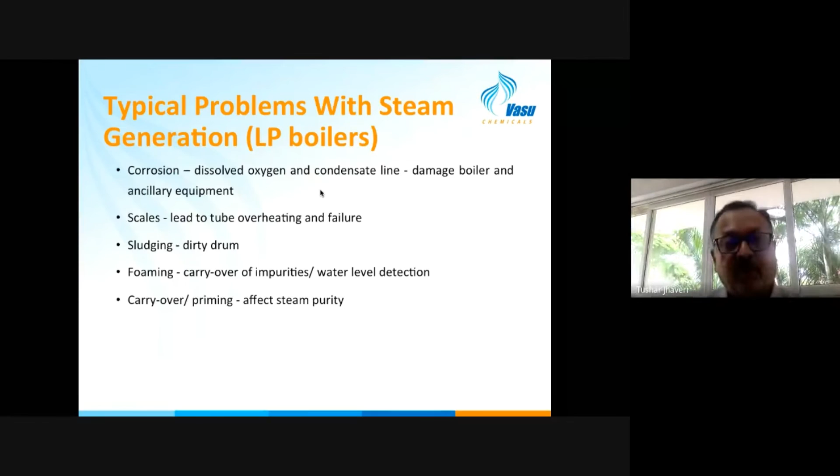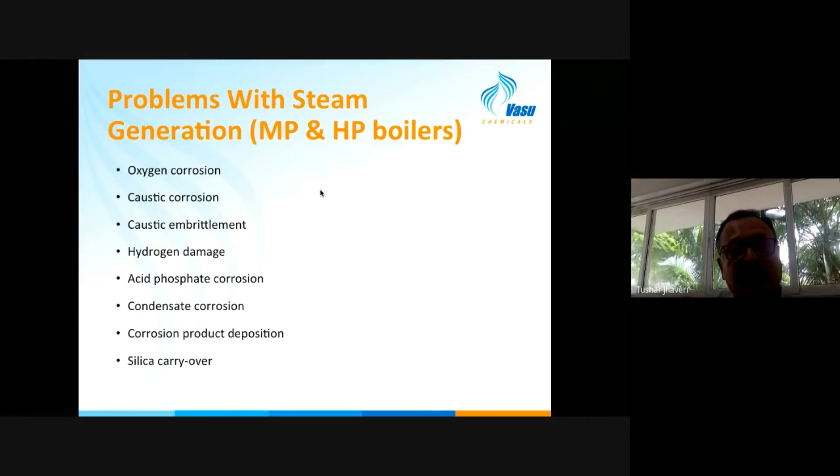In the medium and high pressure boilers, the problems are even more pronounced, which include the oxygen corrosion, the caustic corrosion, caustic embrittlement, hydrogen damage, acid phosphate corrosion, condensate corrosion, corrosion product deposition, and silica carryover. Each of these problems have a solution. Each of these problems need a specific operational conditioning so that the boiler is operated safely and in a correct fashion so that these problems are not encountered.

Several types of treatment programs again, starting with physical type of treatment where it is important to maintain proper makeup water source. If it is a softening plant or a DM plant or a DM plant based on reverse osmosis, it is important to ensure that the operation of this plant is correctly done so that we do not have slippage of some unwanted ions into the boiler water system.

Proper operation of the deaerator is also very important because this will ensure the boiler drum is safe and operating correctly. Oxygen scavengers are also added, which reduce the dissolved oxygen and hence the corrosion. Scale inhibitors are also added to reduce the sludging inside the boiler drum. Alkalinity booster for pH control in the boiler for proper balance is also common.

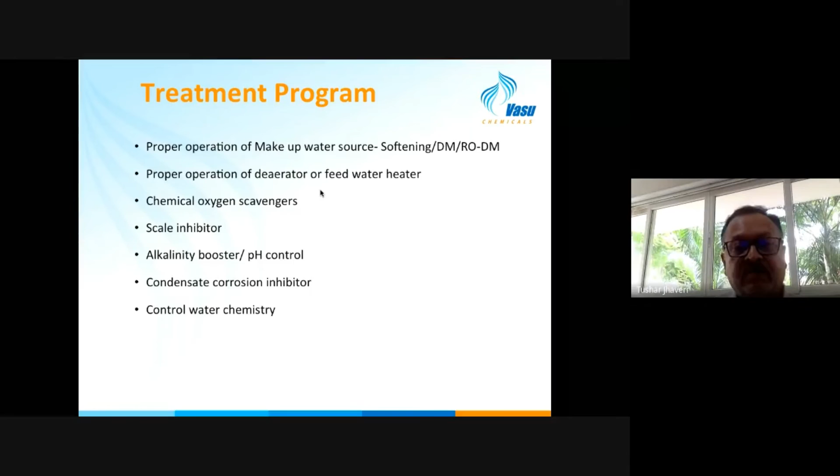In the condensate line, again, a corrosion inhibitor can be added because that line from the condensate tank to the makeup line again is extremely prone to corrosion because the condensate water is usually very corrosive. And of course, the water chemistry needs to be controlled, such as silica, pH, alkalinity, etc.

Next is the process water treatment. Process water treatment is again a very wide field and it changes from industry to industry because each industry has a different need and application of process water in its manufacturing. So process water treatment is usually designed very specific to and tailor-made for each industrial process or sub-process. The treatment is designed to meet specific objectives of the plant, which could include quality targets, reduction in operating costs,

and improving heat transfer. Examples of industrial processes that require these kind of special treatments are in steel plants, oil refining, coal washeries, textiles, dyestuffs. These are some of the industries that have a large usage of process water.

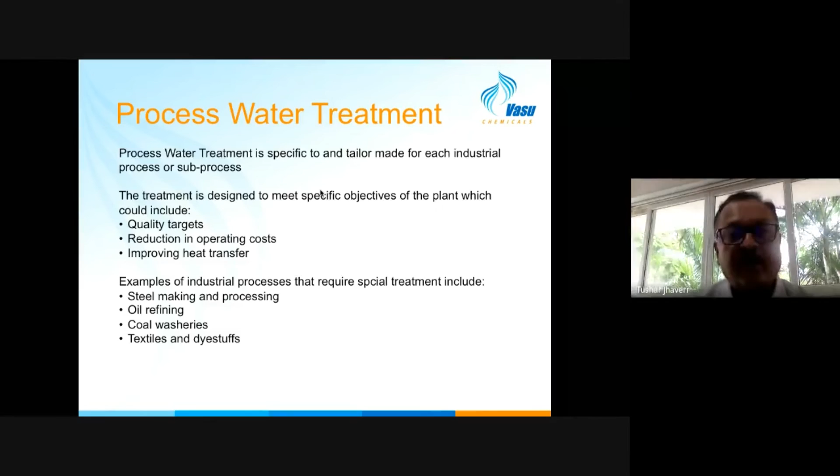In steel making, there is direct cooling where once the molten steel is converted into billets or slabs or wire rods, then they have to be cooled with direct water spray, and that water gets contaminated with the steel and the iron particles. So it requires a very special type of treatment. So that's process water treatment. And again, that can be discussed specifically for a specific industry, depending on what are the challenges that are being faced.

Last is the wastewater treatment, and we all know why that is very critical. It addresses environmental concerns and an awareness that is increasing every day, and it is important to ensure good wastewater treatment so we don't pollute our environment. Also, there is a huge water scarcity, so its treatment and recycling is important. Quality of life is affected also by wastewater treatment because it can affect our drinking water sources, it can affect agriculture, it can affect our recreation and fishing lives.

Industrial reasons are many for wastewater treatment. There are a lot of stipulations by government, pollution control board authorities on the quality of the water that can be discharged from an industrial unit. So prior to discharge, it is important to have proper treatment so that there is no violation. There can be economical reasons also because sometimes reuse of water can be a huge cost saving since that will reduce the usage of the fresh water.

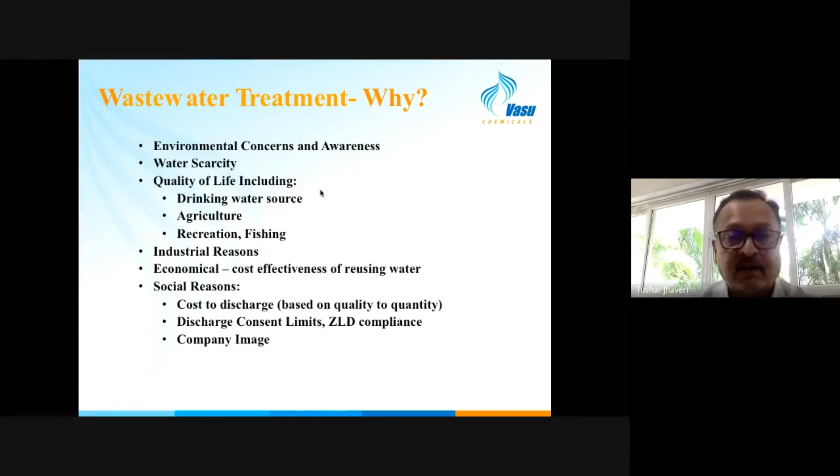There can be social reasons also because the cost to discharge can be high, the discharge consent limits, and ZLD is the zero liquid discharge compliance. Many places in India now have the ZLD compliance requirement, and of course the image of the industrial unit also is an important factor. If they are not discharging good quality wastewater into the environment, then they are going to have a problem for the reputation and sustenance in that particular geographic area.

A simple wastewater treatment plant layout is this way. The influent from the industry comes into the equalization tank where we add the alum, lime, and the pH adjustment is taking place. And then it goes to the primary clarifier where a polyelectrolyte is added. The bottom of the clarifier is the chemical sludge which goes for dewatering into the centrifuge and then for disposal as a solid waste.

The outlet of the primary clarifier goes into the aeration tank, which is the secondary treatment, and this is where the biological treatment, the biological degradation of the waste takes place. Sometimes this is supplemented with bioculture as well. After the secondary treatment, the wastewater is then going to the tertiary treatment, to the secondary clarifier, where all the suspended matter and other biological components are removed, and the biosludge again is going for the dewatering to the centrifuge and the belt press.

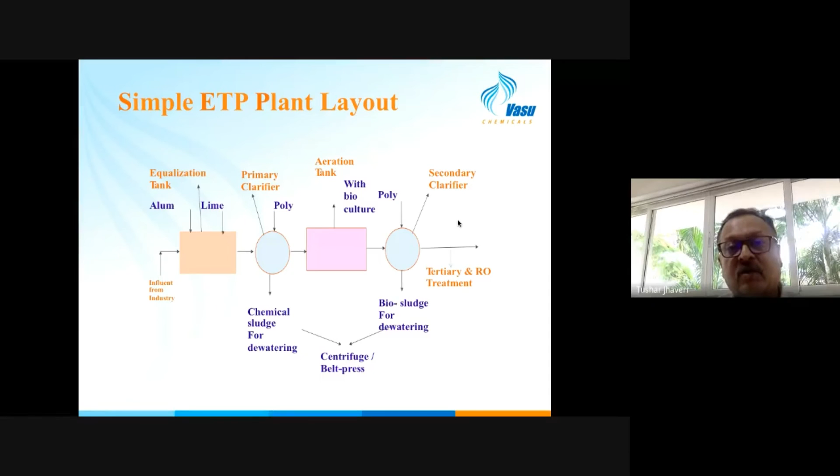And the clear water is then sent either for discharge if it is meeting the environmental compliance, or if it has to be reused, then it goes for tertiary treatment, where typically that will involve reverse osmosis plant to reduce the TDS, to bring the water almost back to its original quality. So this is a typical layout of a wastewater treatment plant in industrial unit. Like I mentioned, this is the chemical treatment, which is primary, the biological treatment, which is secondary, and the tertiary treatment, which is the reverse osmosis, and the sludge handling, which is the dewatering.

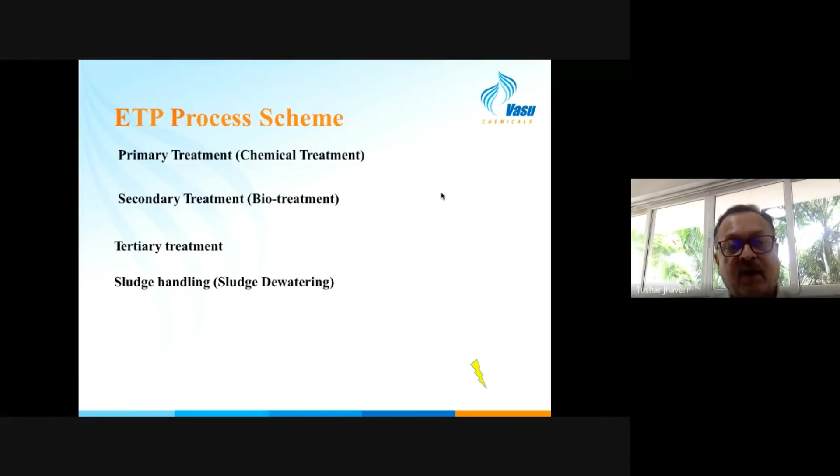This kind of completes the presentation on the 4 types of treatment, which is the cooling water, the boiler water, the process water, and the wastewater. Each of these topics is a topic by itself, and needs a lot of study and understanding, and it varies from industry to industry. So it's a very, very wide and vast field requiring versatile knowledge and application techniques.

So what is our future growth? What is the next generation water technologies? Many times people are asking us, okay, where does India stand as compared to the rest of the world? What is the research going on in water treatment? How do we save usage of industrial water? How do we ensure discharge of industrial water is not affecting our environment and our future generations? So what are the growth drivers for the future? That is important for us to understand.

So there is a lot of investment happening in developing newer water technologies, which is obviously driven by rising population and increasing demand, and which is all leading to a scarcity of water. Pollution and climate change, environmental concerns, these are also very important to us now. The digital revolution which has started coming in is also driving a huge change in the way water treatment applications are employed by the industry. For example, there are a lot of low-cost sensors, meters, and monitoring technology, so that remote monitoring of the water quality can be done.

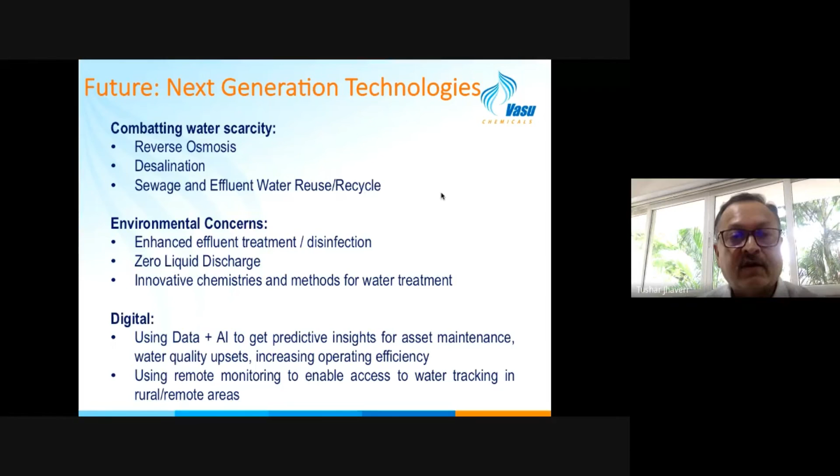And we hope that a lot of the young engineers and students who are with us today will be the future leaders in the development of these technologies, and will play a key role in sustainability of this very important resource which is so critical for our lives. Water, whatever we can do for saving this precious resource is never going to be enough.

So with that, I will end my presentation, and I thank you all for your attention and patience. And I'm now open to any questions or discussions that you might have.

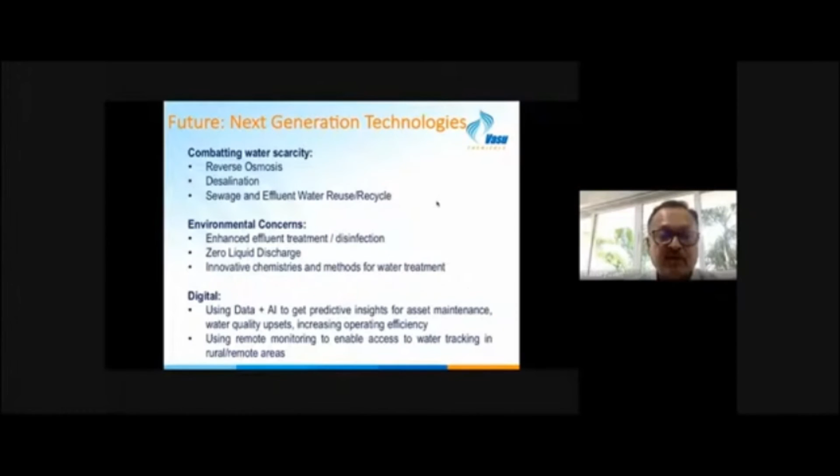Thank you. To enable access to the water tracking in rural remote areas. So these are all going hand in hand and very important for us. And we hope that a lot of the young engineers and students who are with us today will be the future leaders in the development of these technologies, and will play a key role in sustainability of this very important resource which is so critical for our lives. Water, whatever we can do for saving this precious resource is never going to be enough. So with that, I will end my presentation, and I thank you all for your attention and patience. And I'm now open to any questions or discussions that you might have.

Thank you. Hello, sir.

Hello. Yeah, we have a few questions from the audience. One of the questions is from Manoj Kumar Das. Which technique is very effective for water treatment? Which technique for what kind of water treatment? Can you please elaborate? That's all he said, so I'm not sure.

Yeah, I think there are a lot of techniques, but it depends on what kind of treatment, whether it's cooling water, boiler water, waste water. So I think it's an incomplete question. Okay, he can ask on email if he has any further doubts or if he wants an elaboration. Yes.

Another question is from Munendra Patel. Can you please elaborate the role of superbug in water treatment in oil refinery? Role of superbugs in oil and gas. Okay, yeah, sure. This is a technology that we are seeing some people use, but it's not yet found, I would say, a common application so far. It's very expensive and it is very specific. So it requires a lot of pre-testing to make sure that these kind of superbugs will be applicable for treatment.